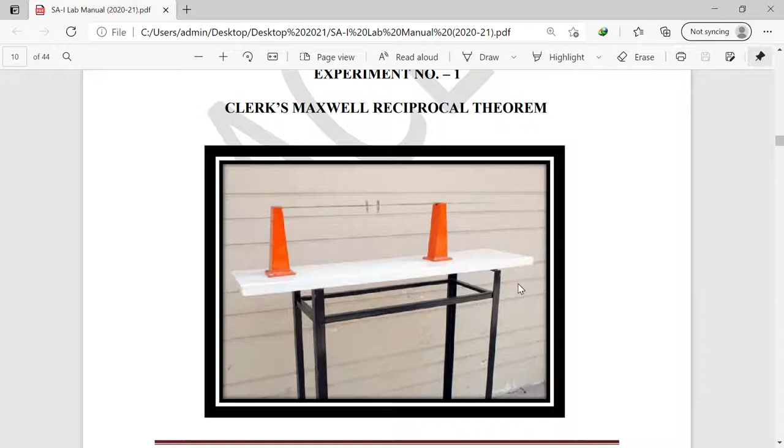To start with our experiment number 1 of Structural Analysis 1, that is verification of the Clerk Maxwell reciprocal theorem. This is a typical apparatus used in the laboratory to verify the Clerk Maxwell reciprocal theorem. First of all, I would like to tell you the basics of the apparatus. This is a simply supported beam. This is a mild steel measuring scale, which is attached to the simply supported beam.

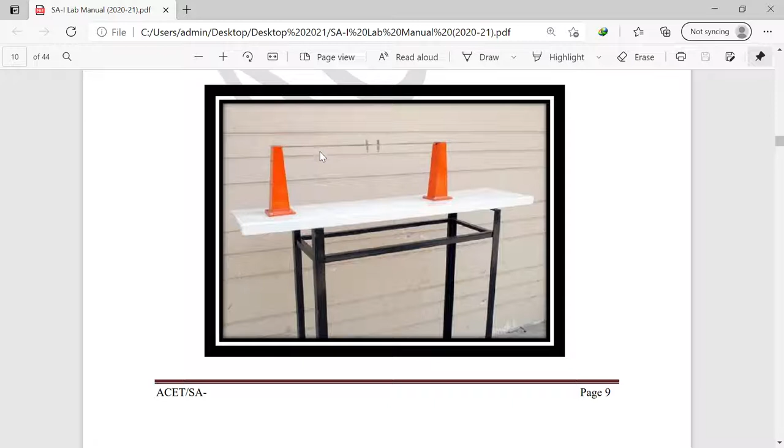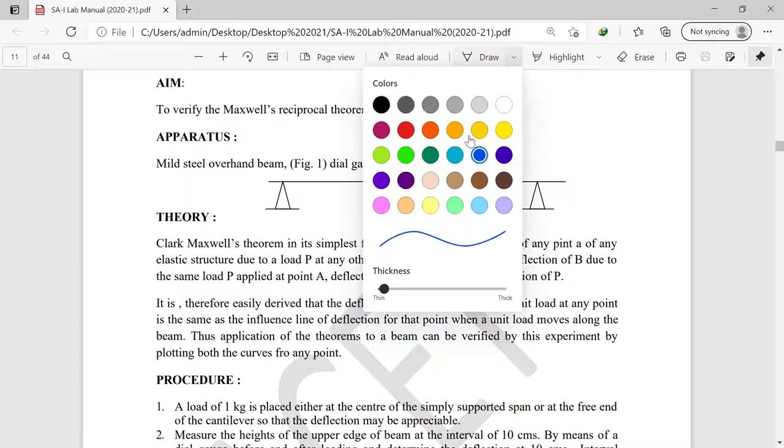These two are the hangers attached to the simply supported beam, by which we are going to place the loads, and we have to measure the deflection by using the dial gauges. So let us see how to verify the Clerk Maxwell reciprocal theorem. To verify the Maxwell reciprocal theorem of a beam, this is a typical arrangement of the apparatus. First of all, let us study some theoretical part of the theorem.

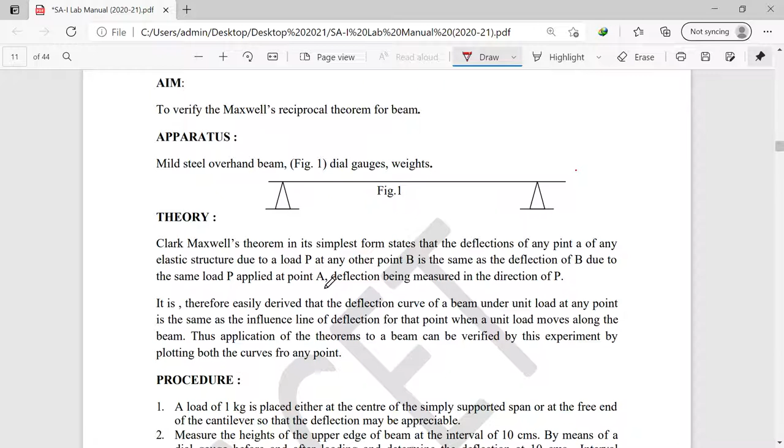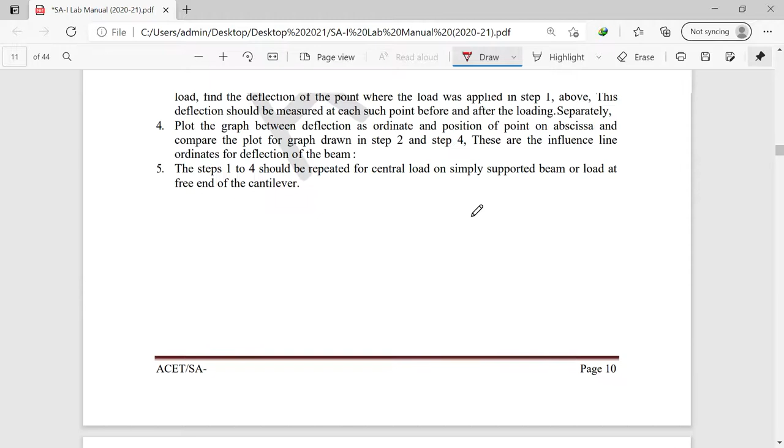The Clerk Maxwell reciprocal theorem in its simplest form states that the deflection at any point A of any elastic structure due to load P at any other point B is the same as the deflection at B due to the same load P applied at A, the deflection being measured in the direction of P. So let us see diagrammatically how it happens. I'm going to draw the diagram. This is a typical simply supported beam apparatus. This is a free body diagram.

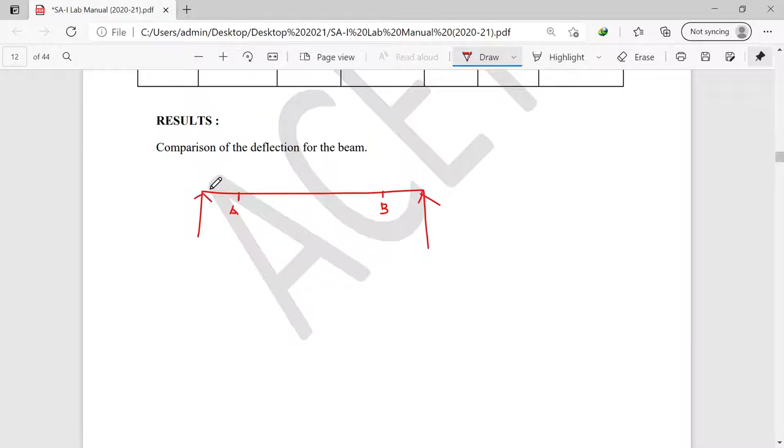Suppose I have considered point A here and point B here. I have marked point A at a particular distance. Suppose here I have considered a distance of 5 centimeters, and here a distance of 6 centimeters. Now I am going to place the load P. Suppose I place a load P of 1 kg at a distance of 5 centimeters from support A. This is support B.

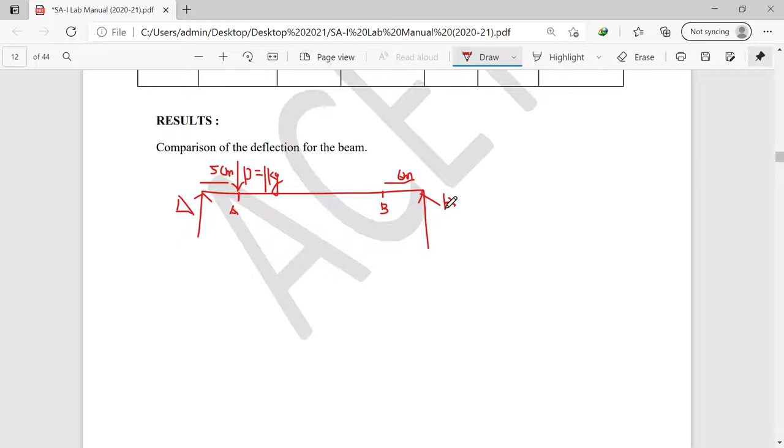So whatever deflection is formed because of load P at B... Now I'm going to place the load P at A and measure the deflection at B. This is the procedure with this particular apparatus. You are going to place the dial gauge at B. Whatever deflection you get because of the load P placed at A, suppose you get a deflection of 5 mm. This deflection must be the same if the same load P is applied at

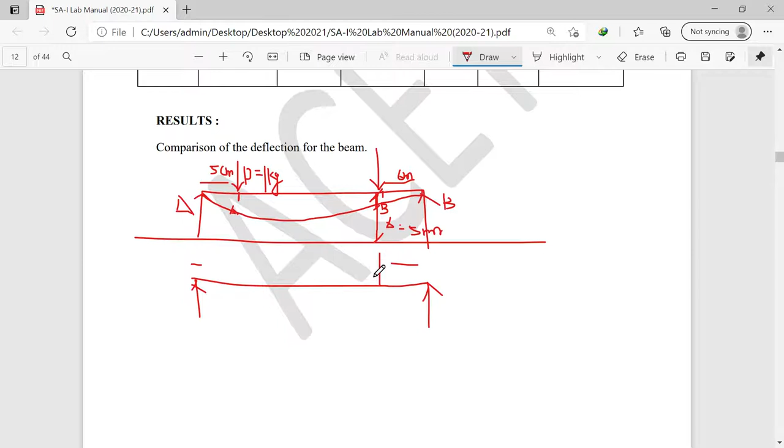B. Now in the second case, at the same distances, this is 5 centimeters, this is 6 centimeters, and this is a load P of the same loading, that is 1 kg. If I apply the same load at point B, whatever deflection is obtained at point A must be equal to the deflection obtained at B because of the same load.

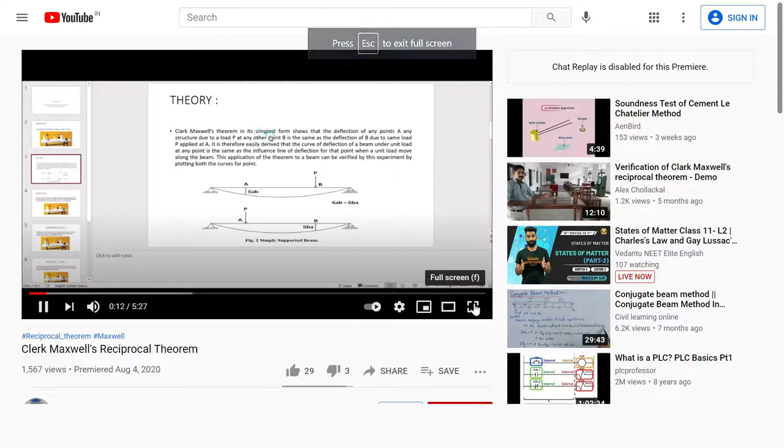Maxwell reciprocal theorem. The Clerk Maxwell theorem in its simplest form shows that the deflection of any point A of any structure due to the load P at any point B is the same as the deflection of B due to the same.

At any point B is the same as the deflection of B due to the same load P applied at A. So this is a simple beam, and the condition applies that for any structure the material should be isotropic, homogeneous, temperature must remain constant, and the support must be unyielding. That means the support should not sink. So in this condition, the material should follow Hooke's law.

So in this condition, if we apply the load P at point B and we measure the deflection delta AB at point A, this is condition 1. And in condition 2, if we apply the same load at point A and measure the deflection at point B, the delta BA, the deflection at point A due to the load at point B, must be equal to the deflection at point B due to the same load applied at point A.

Okay, so this is Clerk Maxwell's theorem, that the deflection will be the same. Either you apply the load at point B and measure the deflection here, or if you apply the same load here, the deflection at point B will be the same. If we do this experiment in the laboratory, this is the simply supported beam with the overhang. This is a type of overhang beam, and this is of mild steel. So we require the dial gauge, weights, and the scale.

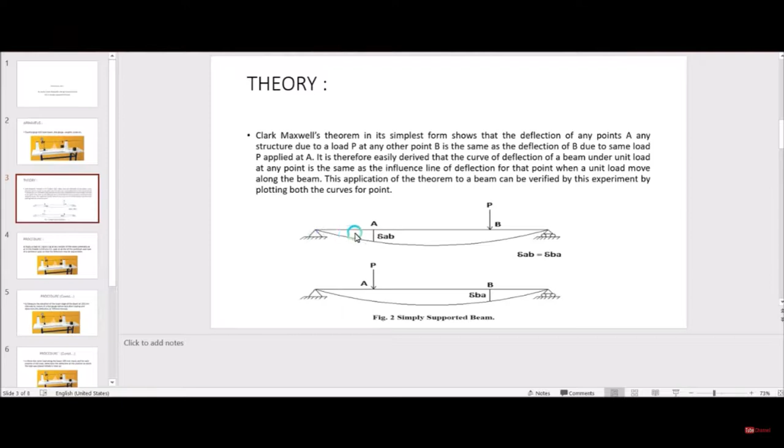So suppose this is point A, and this is point B. So first of all, what will we do? We will apply a load of any quantity, from 50 grams to 200 grams. We can apply any load. So in the first case, suppose we are applying 50 grams of load at point B and we are measuring the deflection at point A. So the deflection will be delta AB. So this is condition 1, that we are applying the load at point B and measuring the deflection at point A.

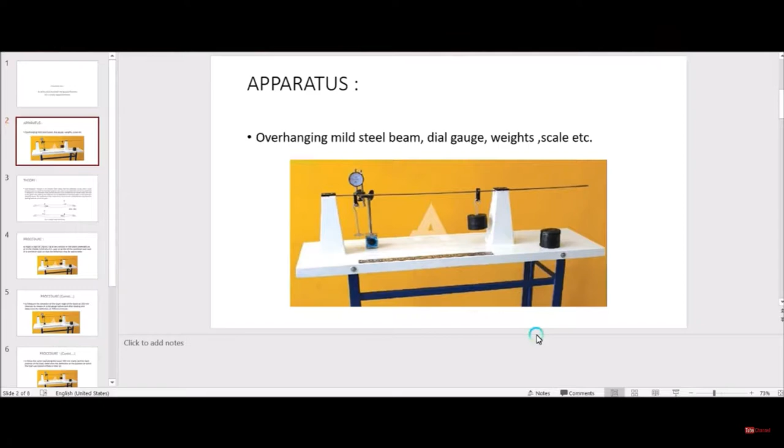So in the second condition, we will apply the load at point A and we will measure the deflection at point B. So both deflections must be equal. This is the Clerk Maxwell theorem. Now we are going to verify this in the laboratory. So we have the Maxwell reciprocal theorem apparatus. And you can see we have the weights and the dial gauge. This beam is made of mild steel.

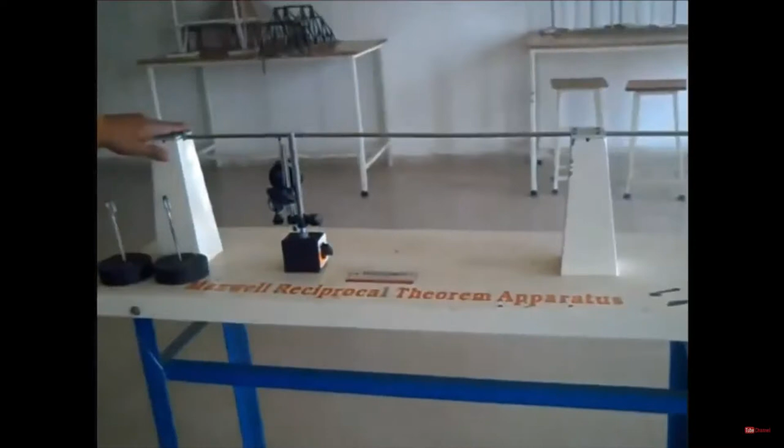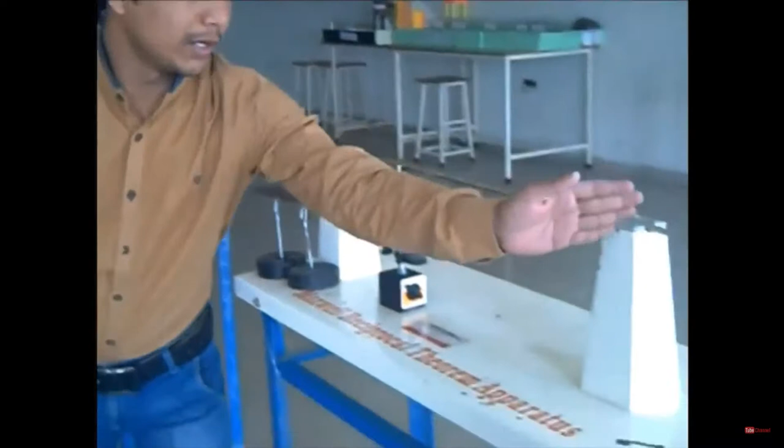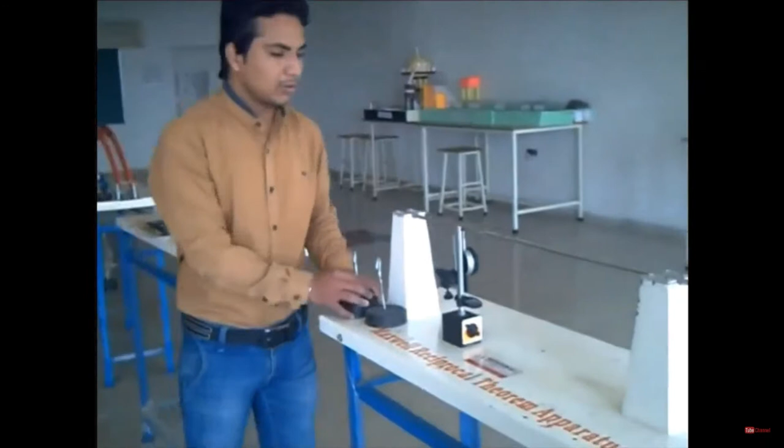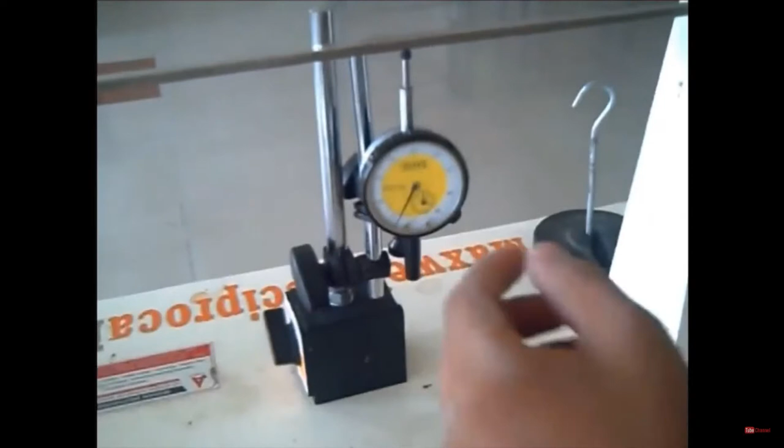This is simply supported from both the ends, and an overhang is also given. This is point A and this is point B. So when we apply the load at point B and measure the deflection at point A, this is point A. Now suppose this is the load and we are applying the load at point B. Remember, this is the 1 kilogram load, and you can see the deflection when we apply the load at point B. You can measure deflection by reading the dial gauge. Okay, this is the delta AB.

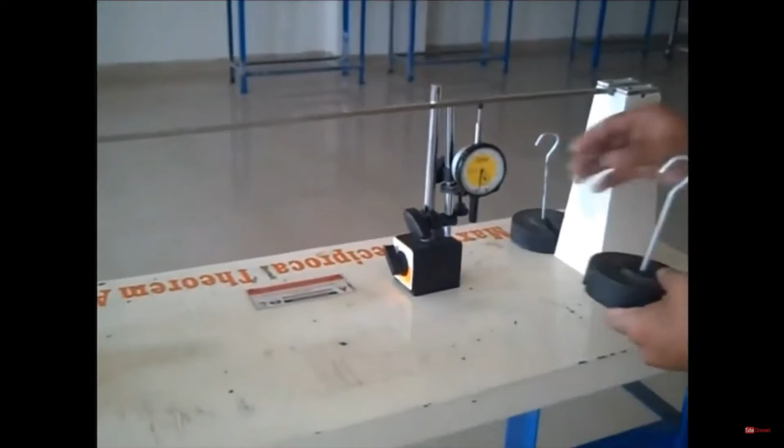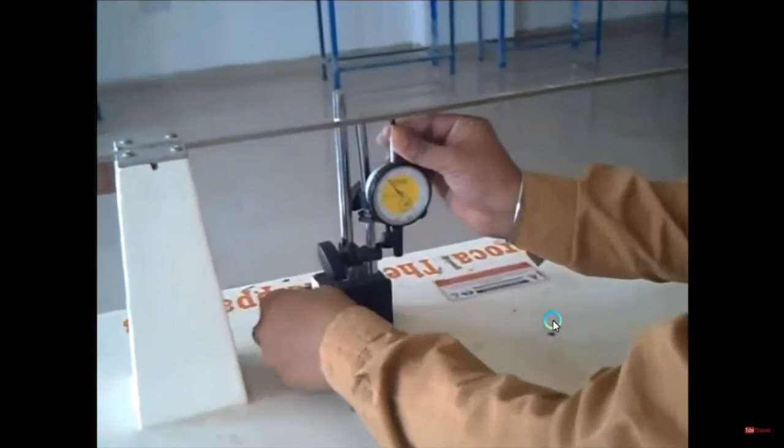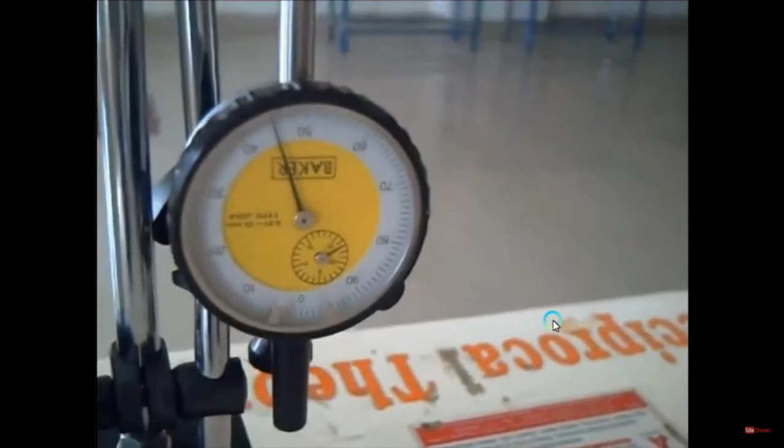You can see this is the analog type dial gauge. We can use a digital dial gauge also. So now in the second case we will apply the load at point A and we will measure. So displace this, place the dial gauge at point B. Now we have set up the dial gauge at point B and we are going to apply the load at point A. So this is the deflection delta BA. From the digital dial gauge you can directly read the readings. So both deflections must be equal.

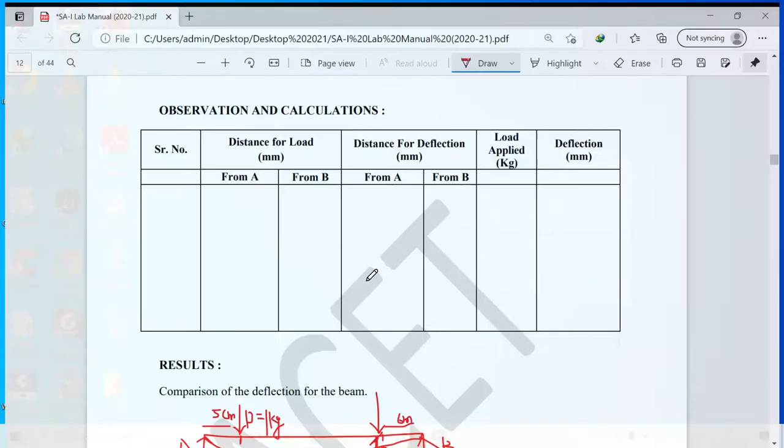So I am going to give you the readings for the same by Monday or Tuesday. So you just write down these readings in your lab manual, and take a screenshot after writing the observations and calculations in your lab manual. Just take the screenshot, or you can directly make a PDF of the observation table and calculations, and after writing your name and roll number at the top, submit it in Google Classroom.

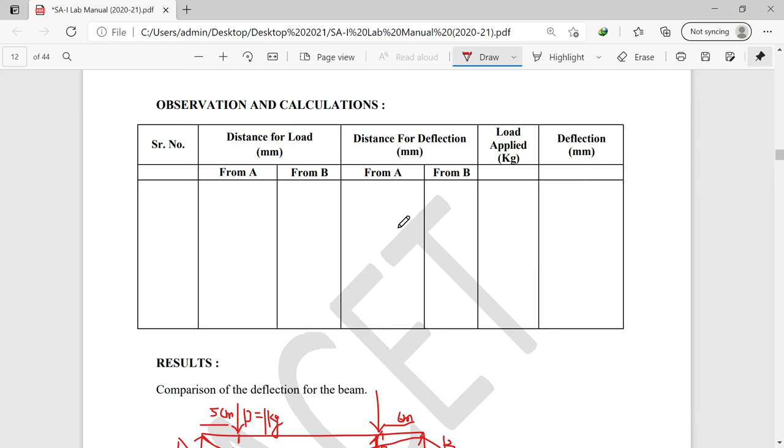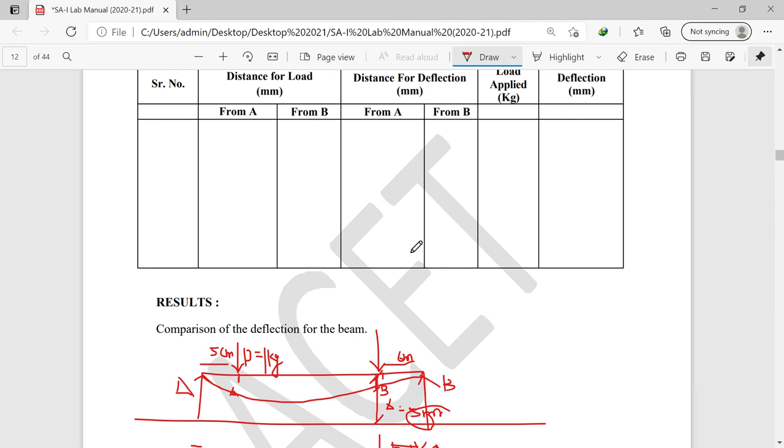I am going to make the folder of practical number 1 in Google Classroom, so you can directly submit the PDF of this calculation part in that folder, writing your name and roll number at the top, so that the assessment of practical number 1 can be easily done. And if you have any doubt related to this practical, you can comment in the comment box section. So thank you very much for your kind attention.